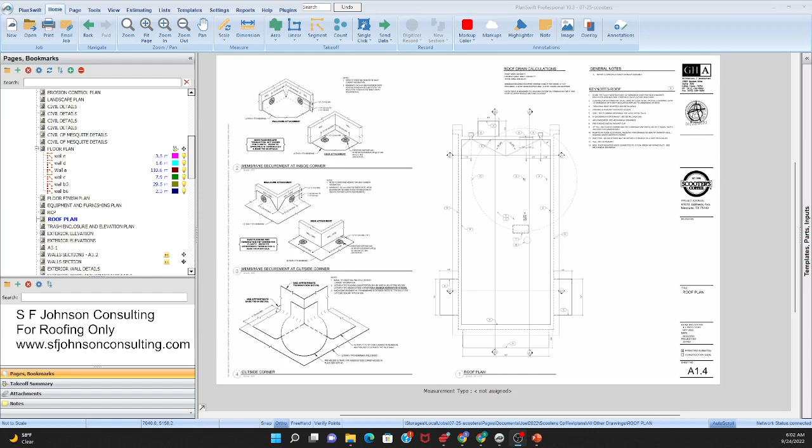What we have here is a small roof for a Scooter's Coffee, and this is the scope of work. The keynotes on the roof show it's a TPO roof, 60 mil, over a half-inch DensDeck over poly insulation. We need to determine how many square feet of TPO, and check if we have parapet walls, which we do.

What is the square footage of that? Chances are the roof finish is going to go over the parapet wall. Then we have some parapet caps, so we need to account for that. This is typical for every roof, so it's not anything unusual - we need the square footage of the finished material.

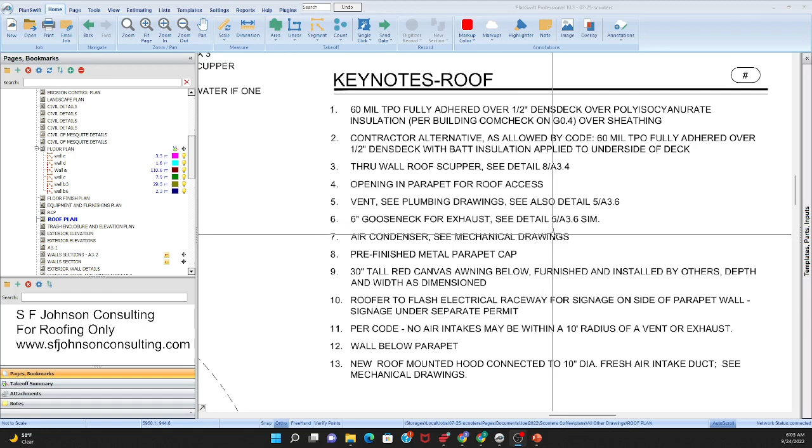The cricket sizes, possibly, and how many linear feet of flashing for a particular purpose. Anywhere where wall and roof meet is usually a place to put flashing. So I always give the perimeter of the roof, and any of the cricket lengths.

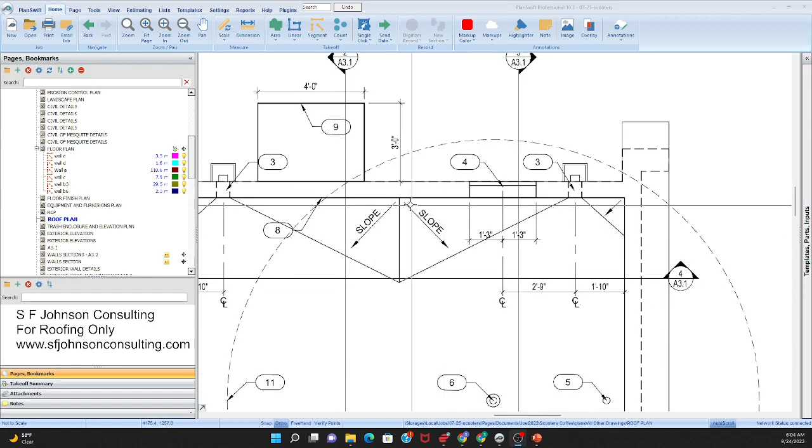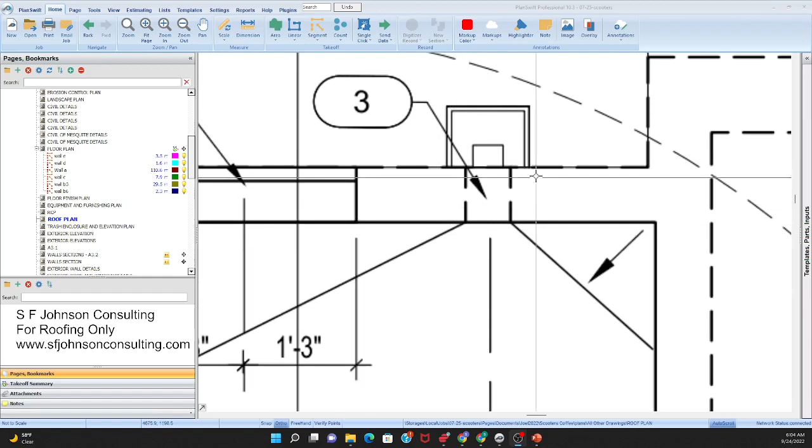What's a cricket? It's additional framing we place over the main framing to give it a slope so water doesn't gather there. The arrows indicate the direction the water's going to flow - we want the water to flow towards the valley, usually to roof drains, gutters, and downspouts.

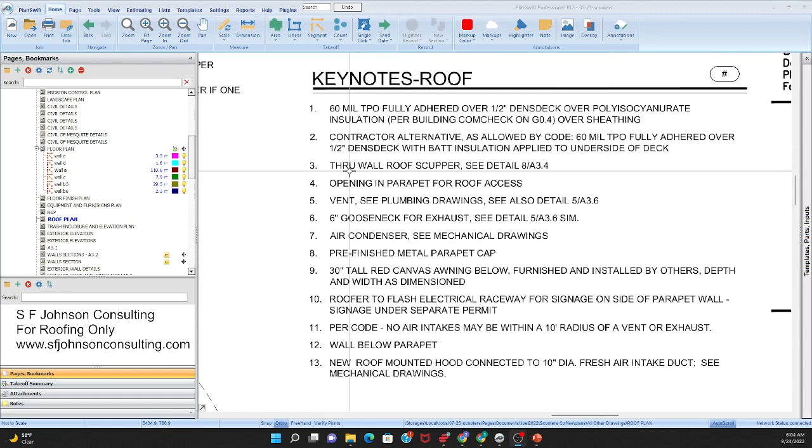A roof scupper - so what do we have to do? We need the total square footage, and we have to measure the linear feet of the perimeter, because chances are the length of the parapet wall goes the perimeter of the building.

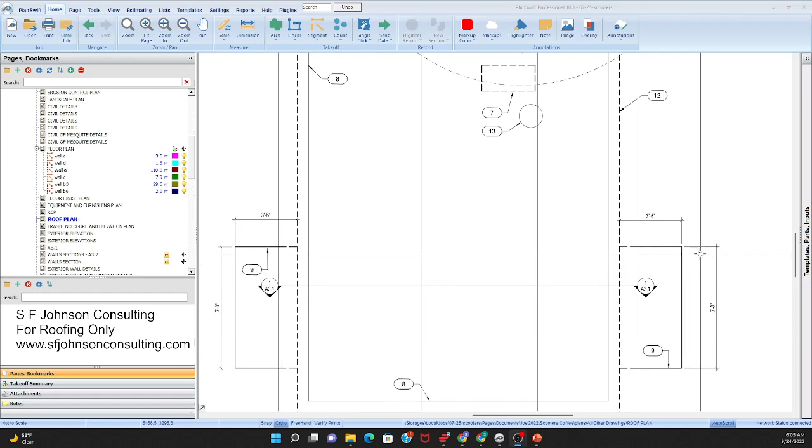We're going to look at the section views - that's a building section view, so we can see the thickness of the insulation and all the other details. From the plan view, we can only determine square feet of the finish plus linear feet. For the roofer, always determine how many square feet of opening we have - this is an opening for a rooftop unit or condensing unit.

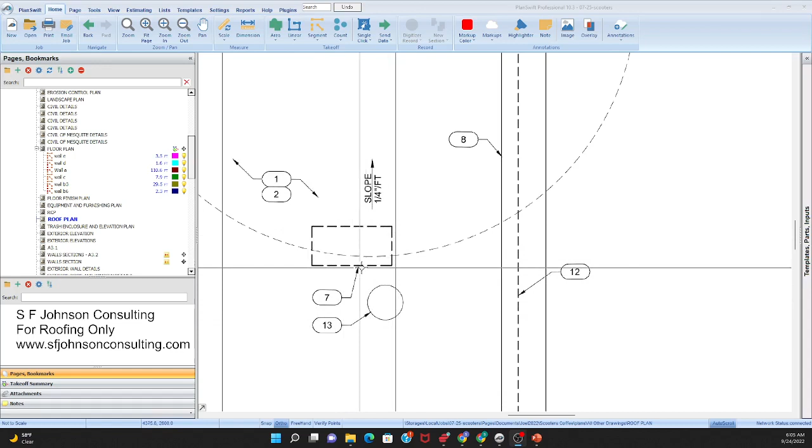Then we want to know the square footage, and since it's a circle, we just square it out, because we want to give the roofer the square footage of the opening, since they're going to deduct that if they want to - it's just waste, deducted from the total area of the roof.

So, area of the roof, perimeter of the roof - we're going to have to look at a section view to determine the parapet height. So, let's go here.

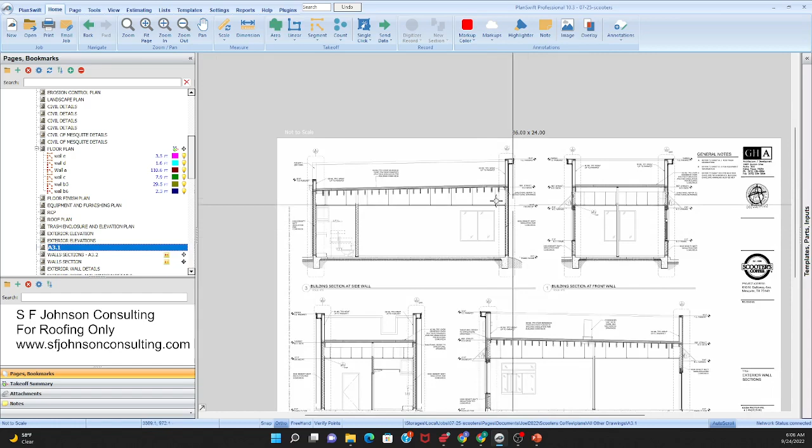We have 4 different building section views. This building section view is good for a bunch of people, especially since it's such a small building. It's good for the framer if we need to know the full height - the full height of the shear walls, which usually goes the full height of the building.

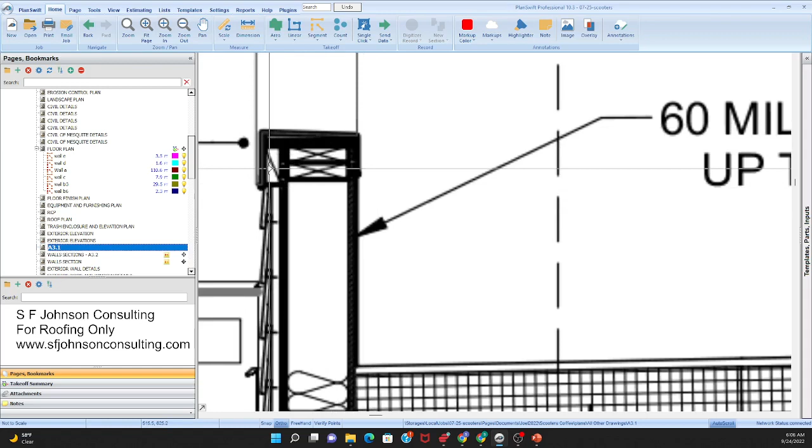So now I know the shear walls are going to be this height, so I can use this for that, and for the thickness of the insulation, and for finished carpentry. This looks like 2 top plates, and it's most probably at the perimeter of the building - this tells me my roof finish. I can see this is batt insulation as opposed to board insulation, and if I'm the insulation professional, I can use this to determine the height of my insulation.

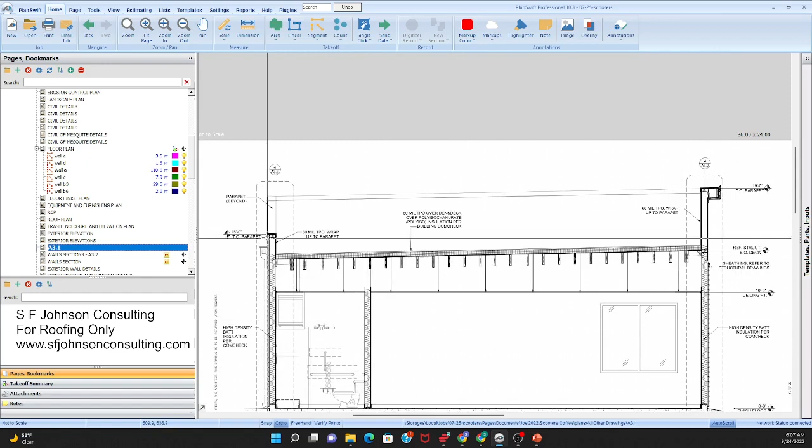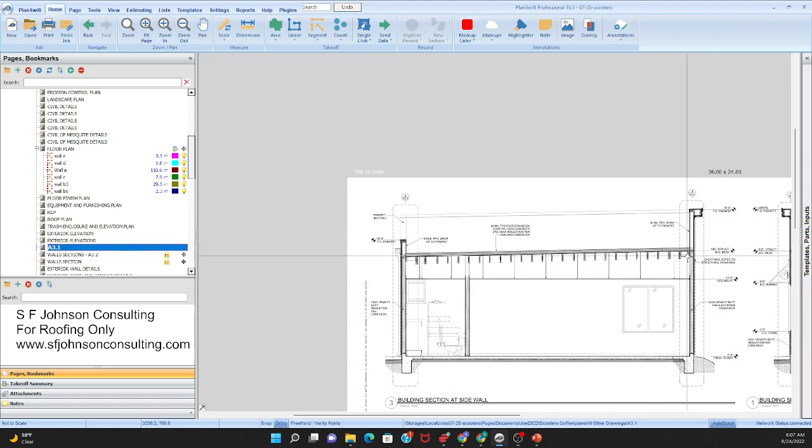A lot of good things from this view. But because we are the roofer, we have to make sure we go to the next view. Why? Because this is a call out, a detailed call out, meaning it's telling us it's going to call out just this portion of the building. And because we're the roofer and our roof is showing right here, we know that our parapet wall looks like it's a different height based on the side of the building.

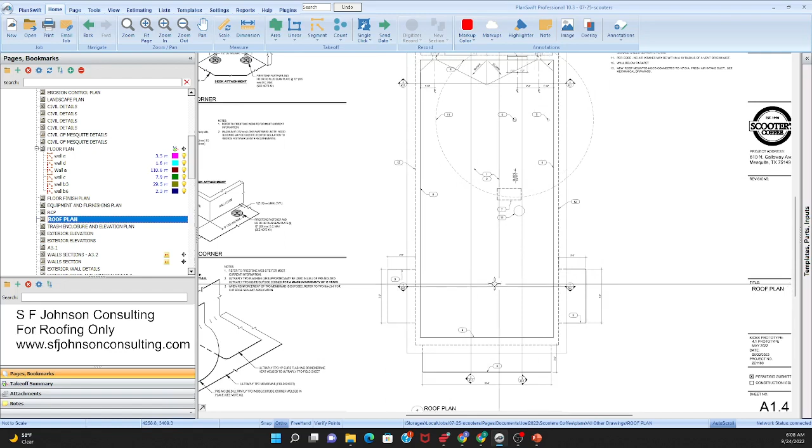So we have to go back to the roof plan, and the 1 over A3.1 would be the height for these walls, because that section view goes through both walls. So that indicates that both of these walls are based on that height.

Now, once we get here, it's going to change. We're going to look at 4 over A3.1. So if that parapet wall happens to be a different height, it's going to be at this point forward, and we're going to calculate the different height. But for this whole section, till we get here, it's going to be whatever height is shown.

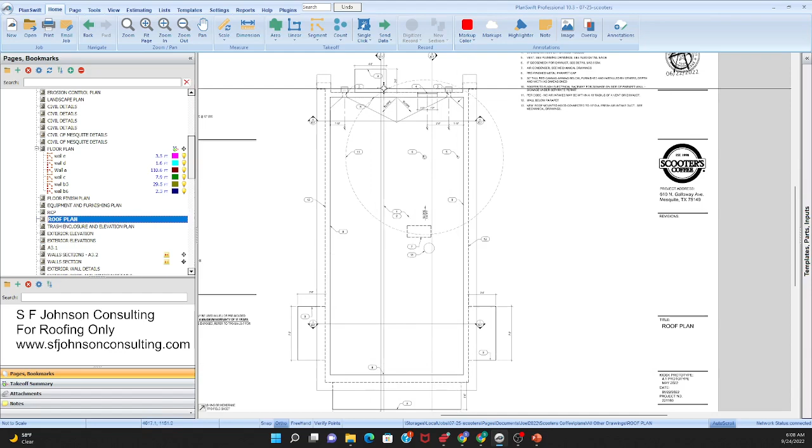And then these also have a different height. We'll look at 2 over A3.1 for the height of these parapet walls, because again, we can see that the parapet walls are a different height. Okay, so that's how we get that.

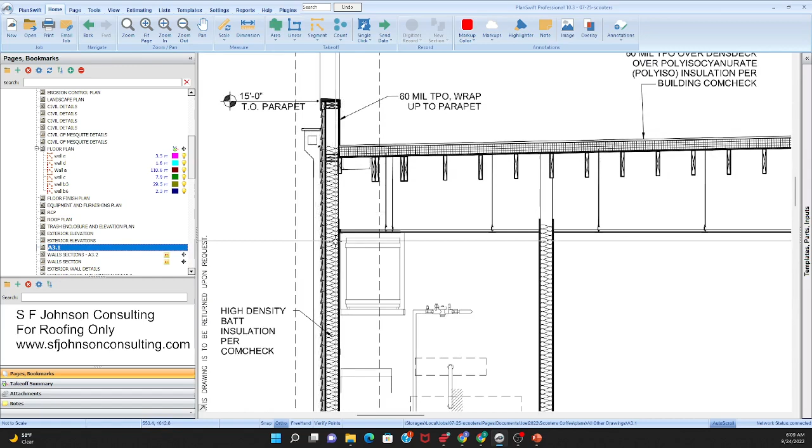So I want to go to more of the detail view, so I'm going to go to 4 over A3.1. It still gives me another detail call out. So I've got to follow every one of them because I'm the roofer and I have to make sure I followed every detail call out until there's no more. So I still know a lot about this.

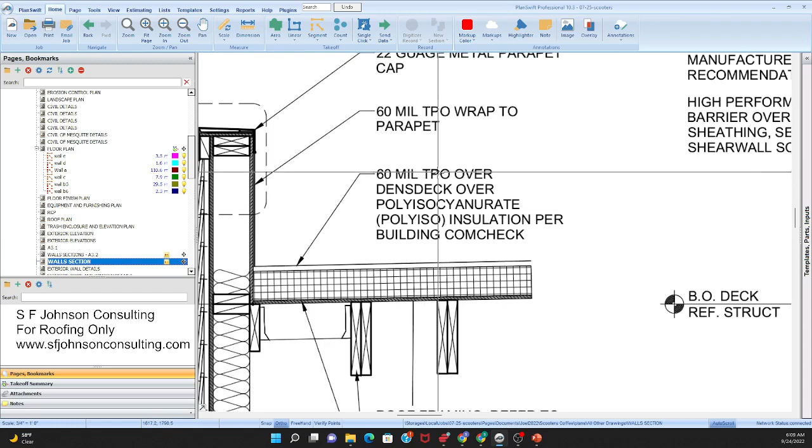I know that my finish is going to go up the parapet wall. I know I have a 22 gauge metal parapet cap that is this width, and I still got to go to 7 over 3.4.

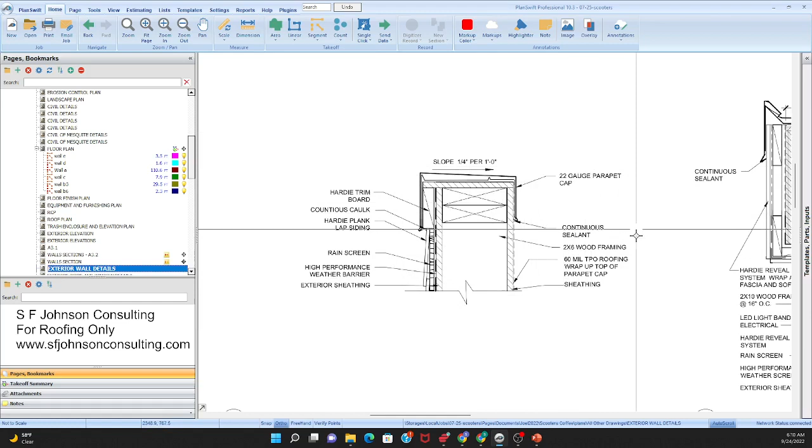So you got to have patience. And because you don't want construction defects, you're going to make sure you go to every view that you're sent to. And so we see here that there are no more views, no more call outs, no more anything. So this is the final of the views, the final of the detail views.

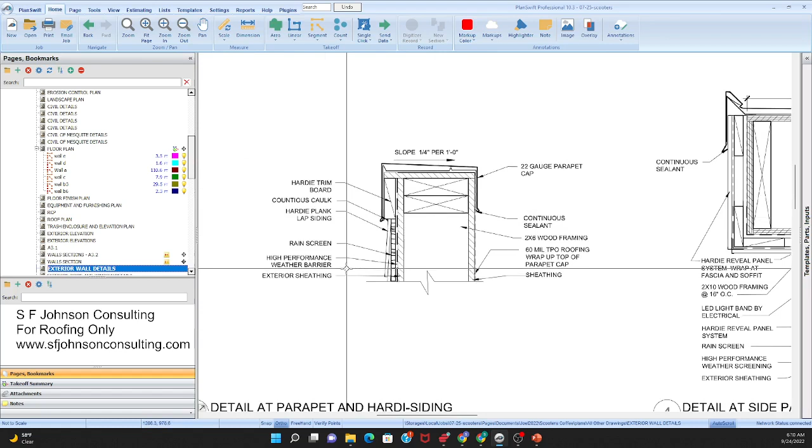And so as the roofer now, I know that I need to do all of this for my parapet cap. And I know that even the rough carpenter is going to come to this view too, or have it, because they need to do all of this. And then if you're doing the siding, then yeah, you're going to come here too. It's going to lead you here too. So all of the views are based on whatever you do.

If I'm the flooring professional, I'm not looking at these views because it's not my scope of work. But if I'm the rough carpenter, the siding professional, the roofer, all of these, it's my scope of work. Okay, so I have to go to every view.

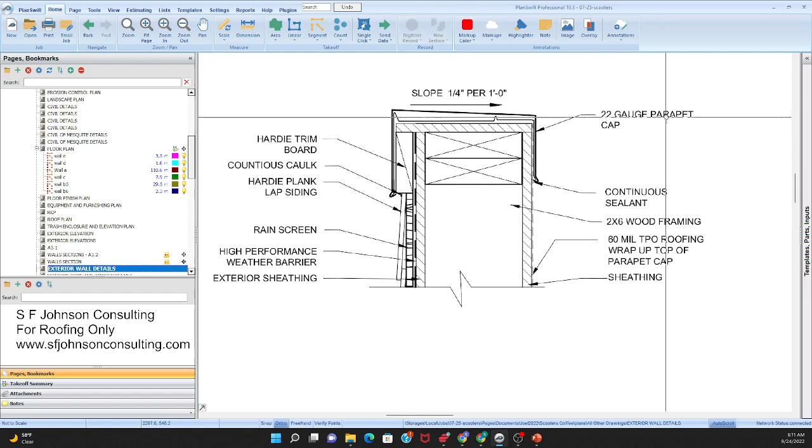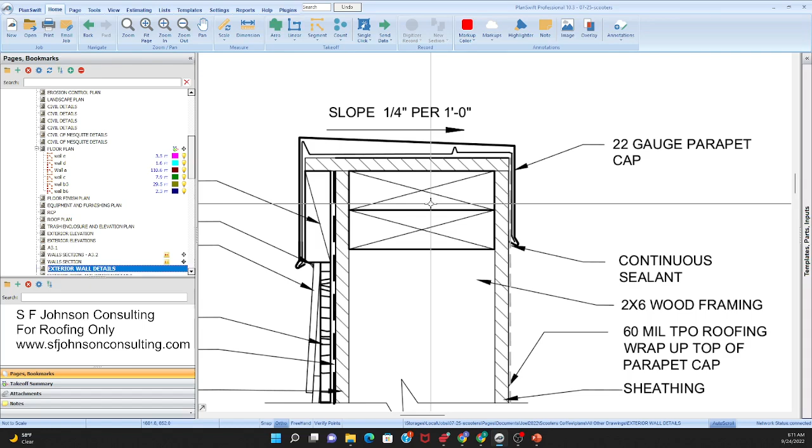And so now I know that, because I'm looking at the plan for my takeoff, even for the rough carpenter, I know I have 2 of these top plates. So 2 times the perimeter of the roof, if I'm doing my takeoff for that. I know I have the sealant, continuous caulking, so I know how many linear feet of caulk I have. I know from the container how many linear feet of caulking, 8 ounce, 16 ounce, 32, whatever, a bucket, whatever. So that way I can do a proper takeoff to do a proper material determination, material cost determination.

Rain screen, high performance weather barrier. You don't want to miss out on any of that, because if you do, chances are it's going to leak and you're going to have a construction defect. And if whatever trade was your trade, you'll be responsible for all the other trades that got damaged because you failed to do your portion.

That's what I did for a living: construction defect litigation adjuster. That's why you get that insurance, just in case you don't know how to read a set of plans, you don't get to the detail call out number 6 or whatever, and you forget to put something in your construction, and you blow it and it leaks and somebody gets sued because now the whole building is leaking, right?

So you want to make sure you know how to read your plans. Okay? Come to the construction queen.

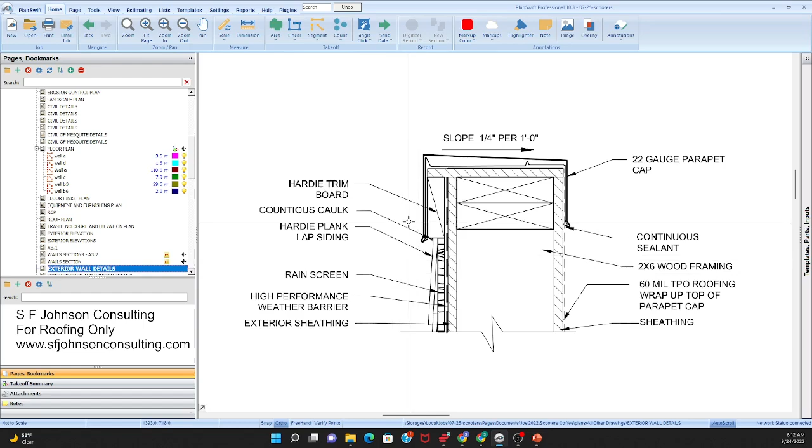I think this is the only time I ever referred to it that way. What were you thinking when you came up with that name? Oh, probably a shot of tequila. See, I'm perfect for this job.

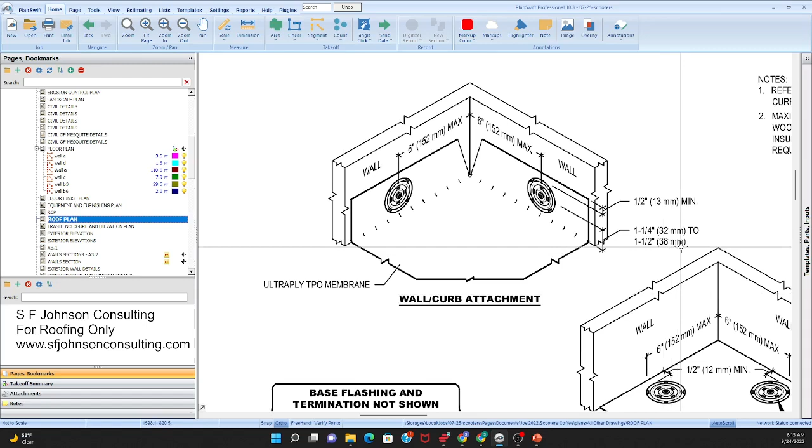Because, well, what's the purpose of the roofer? To make sure no moisture gets in the building. Okay, so that's why we have the TPO roof on the roof and over the parapet, with a parapet cap with the caulking so water doesn't intrude into the building.

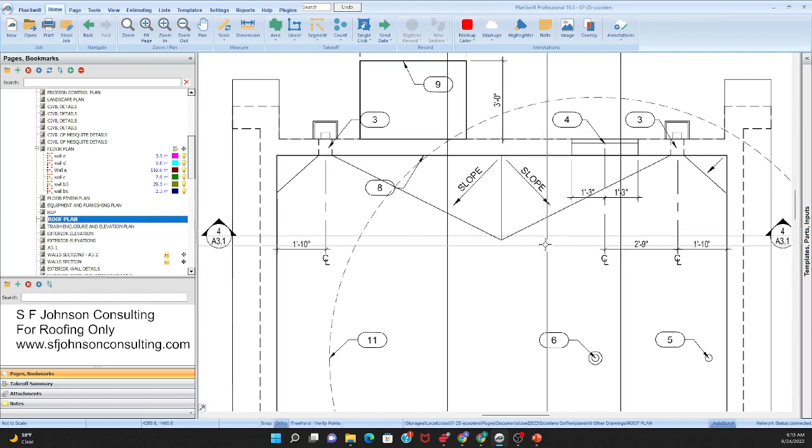Okay, so what do we do as the roofer? Square feet of the flat roof. Now we know we have to break up the section view, right? Because at some points this parapet wall is 3 feet, at some points it's 5 feet. So we have to do 5 feet times however many linear feet, so we're accurately determining the additional TPO for the parapet wall, right?

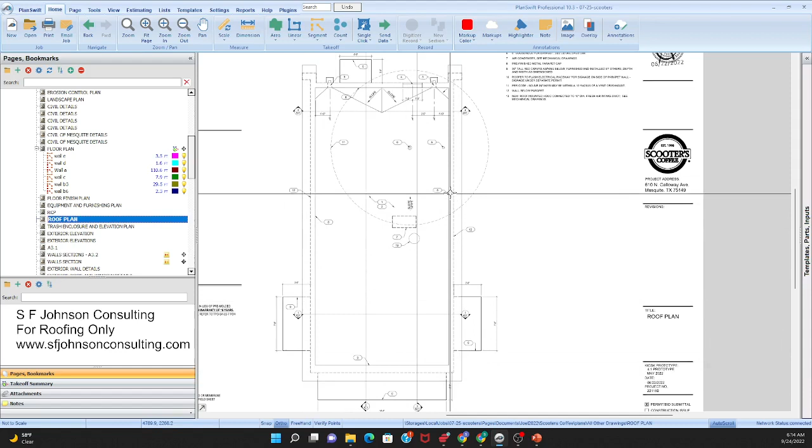And now we have to measure how many linear feet for the parapet cap and whatever else goes with our scope of work. And we have to make sure we're doing whatever this tells us for the openings, whatever number 8 tells us, whatever numbers 5 and 6 tell us.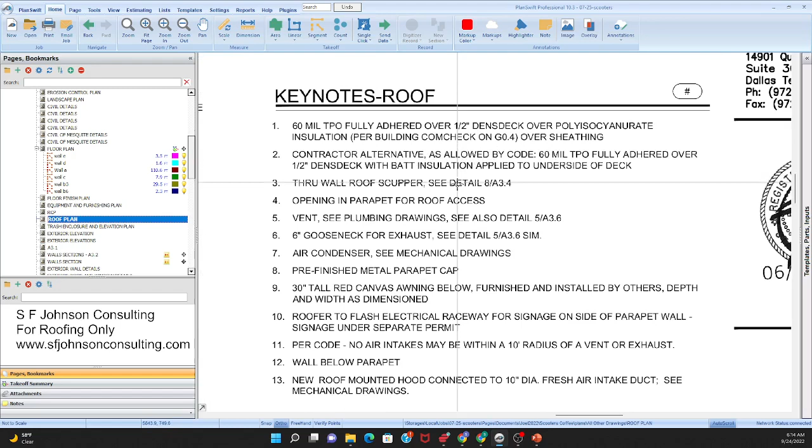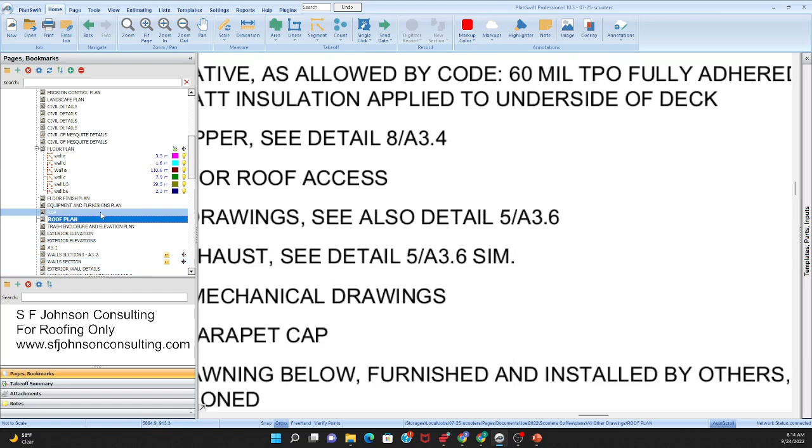Vent, that's easy. So we've got a flash and it's going to show us at 5A. Let's go to 5 over A 3.6. I never pan in the first time right.

Okay, so here's the vent pipe. Because what's the point? We don't want moisture coming into the building. So we have the vent pipe, that's the plumber. And now we have to do all of this - we're the roofer.

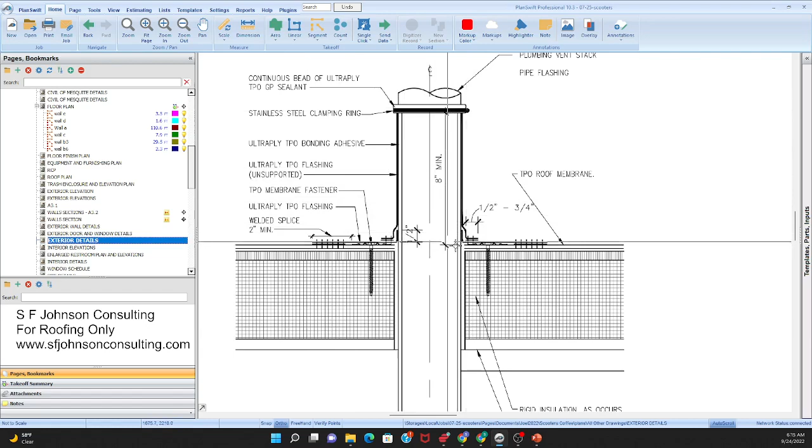Okay, so you need to know how to do it and how to account for it. And so it's a vent pipe, so it's a circle - you could treat it like a square. That's fine when you're doing actual takeoff numbers for how many linear feet of TPO, to what point, and it tells you, I think, stainless steel clamping ring, sealant. See, what's the point?

So no water gets down in there. So you have to be able to follow every section view, detail view, so you're doing the right thing.

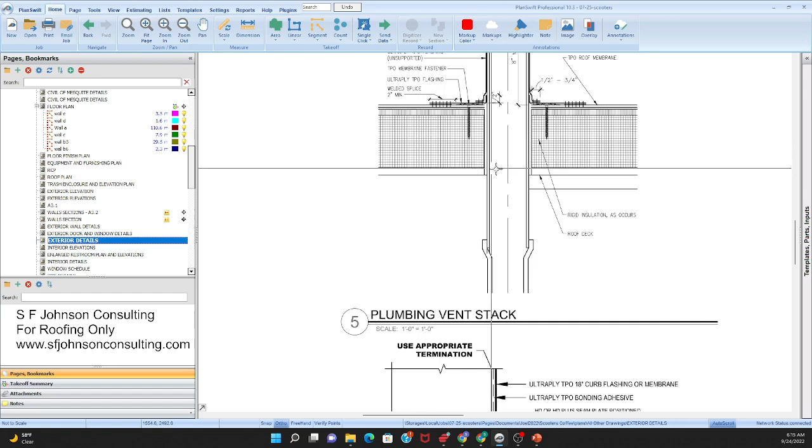Okay, roof deck, rigid insulation. And if this is to scale, which it is, then you can just measure what's the thickness of the insulation. That's the whole point of having something to scale. If you don't know, it's like 4 feet, 4 inches, 6 inches, whatever. What is this? This is different from that. So you've got to make sure what that is.

Okay, so it's fun. It's a lot of fun.

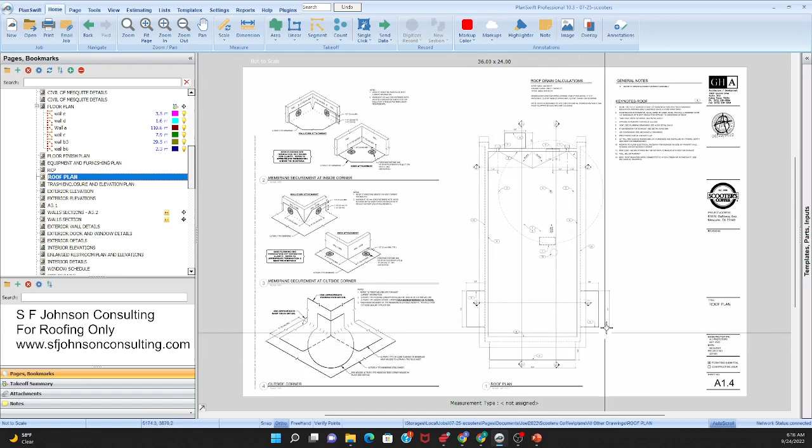All right, so roofer, you are going to make sure you know how many square feet flat, how many additional square feet for your parapet wall, parapet cap, all the goodies that go with that, and know the heights.

That's why they give you the section views, because the section view marker is what? This is, we cut down in 2, and now we're opening up and we're standing in here and we're looking at the interior construction so you can have a better view.

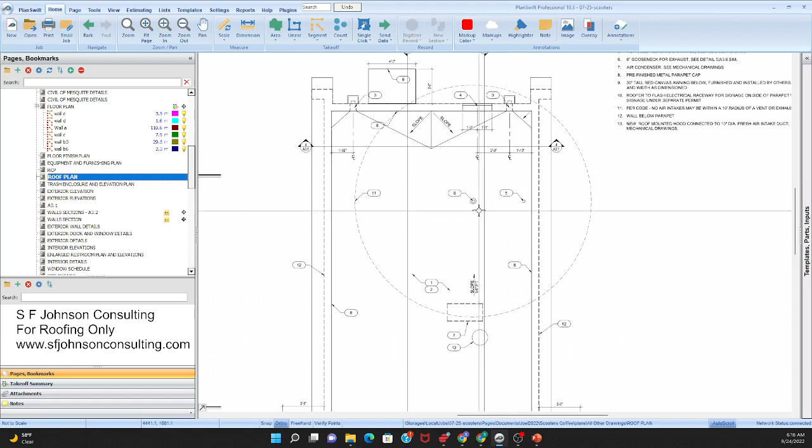And then that view will take you to a detail view most likely. Okay, and take you to all of these other places so you'll know how the vent pipes come and are flashed, and how the... let's see what 7 is. We didn't look at 7. Air condenser, see mechanical drawings.